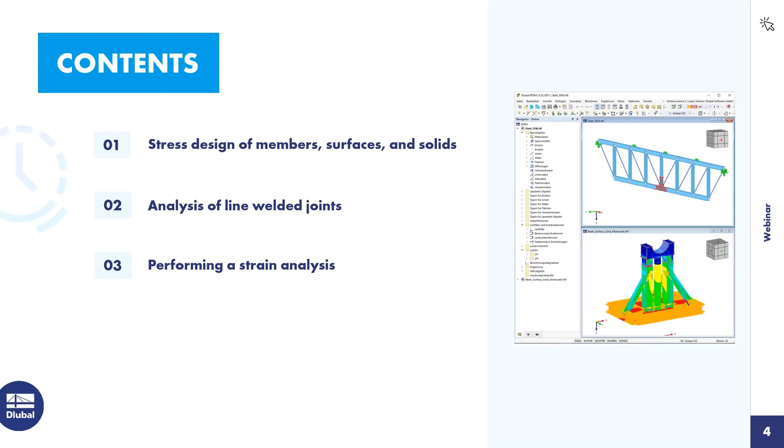I will do it as a live demonstration, so I didn't prepare any additional PowerPoint slides, so I will jump directly into the program. Today I also would like to work with predefined files in order to keep the focus on the essential topics. What do I have here? I have a mixed structure here, mixed meaning I have a member structure, surface elements, and also solids. Let me quickly change the rendering so you can easily see the differences.

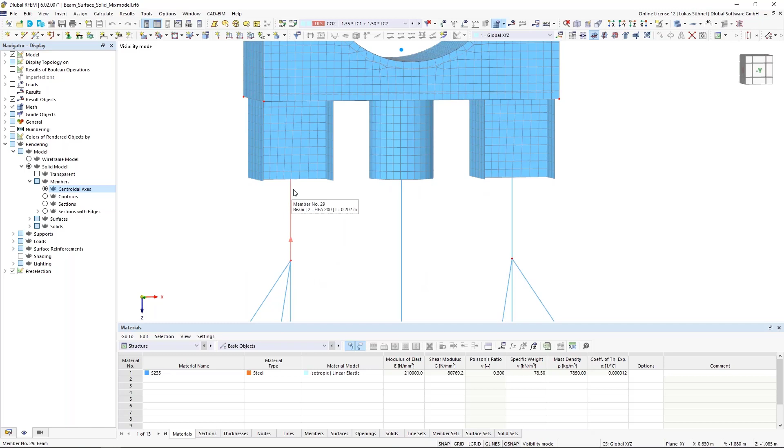On the bottom, we have this member structure. Then I converted a certain part of my members into a surface structure, as you can see here. It's just the continuation of my members if I display them again. And on top of that, I have my solid model on which I will place some loads.

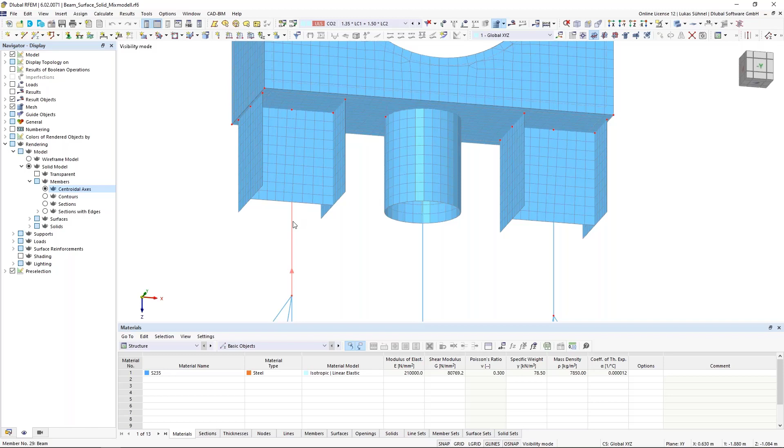Regarding the modeling, which is maybe also interesting to know, in general we can model members, surfaces, and solids in one structure, which is already quite nice. And if you think about the load transfer and the correct transfer of the stiffness, you have to take care of some things when you have 1D elements and 2D elements. By simply converting these members into surfaces, as I did here, often you don't have a properly defined connection.

You can see it on the left. The surfaces in that area are now basically supported on only one FE node, the FE node where this member connects to the web of this beam. That is of course not correct. You would definitely get singularities in that area, and the stiffness transfer is also not correct.

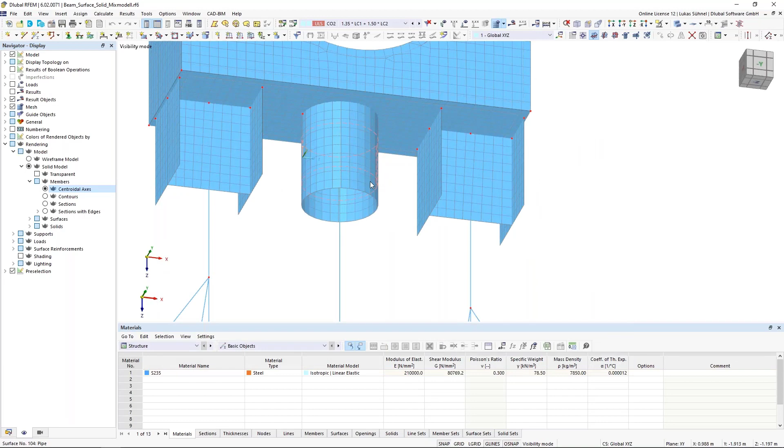Another example can be found in the center. We have here a pipe section. When you convert a pipe section into a surface, you get, of course, the pipe surface. And in such a case, you have no connection at all. You can imagine the member is in the center of that circle, and the surface is not connected to that member at all. So here we also have to do some modifications in the modeling to have it properly connected.

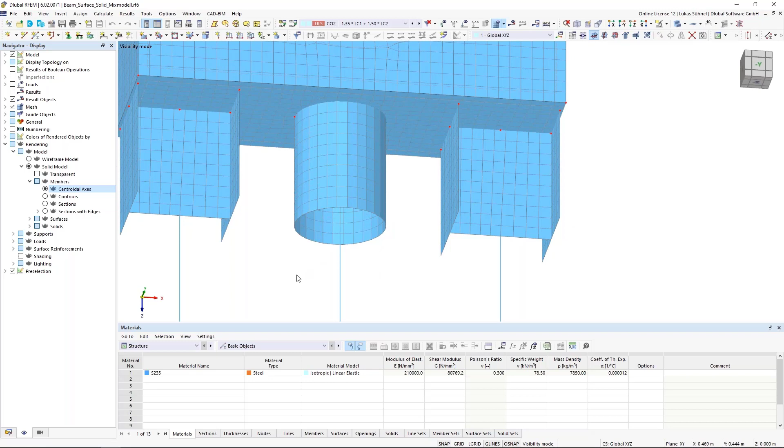And I have it here, I just didn't show it so far. So I will cancel my visibility mode, and the connection can be done in, let's say, two ways. I can use so-called rigid surfaces, and this simply will transfer all my forces and my deformations that I have in this beam, or also vice versa in those surfaces, via a stiff surface onto the other side.

In the center, it's even more crucial, because with this stiff surface or rigid surface, I'm connecting my member with my surface. Before I had no connection at all. And again, of course, all deformations and internal forces will be transferred from the beam to the surfaces equally, let's say. An alternative modeling is visible here on the right-hand side.

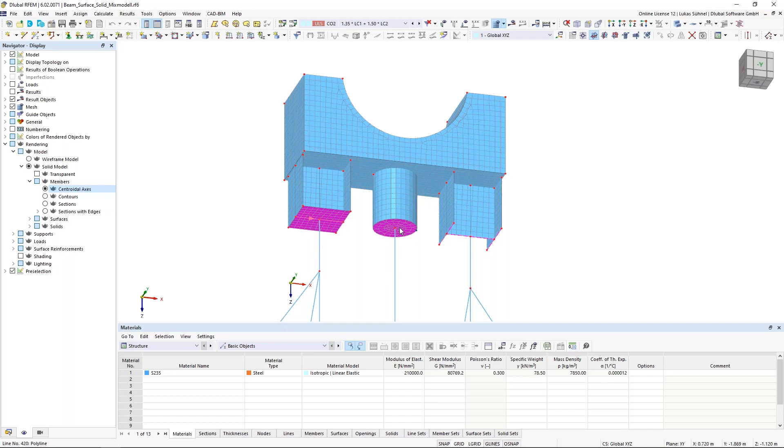Instead of using a rigid surface, I simply assigned rigid members onto the boundary lines of my surface model. A member with a member type rigid, and it works similar to my rigid surface. So this is how you can connect a 1D element with a 2D element. The rigid surface or rigid member may help you here.

Regarding the connection of a surface model with a solid, well, this is quite easy. The surfaces are defined by the boundary lines. These are those lines here, which you can see, and these lines are placed inside the boundary surface of that solid, and we have a so-called automatic object detection in those surfaces.

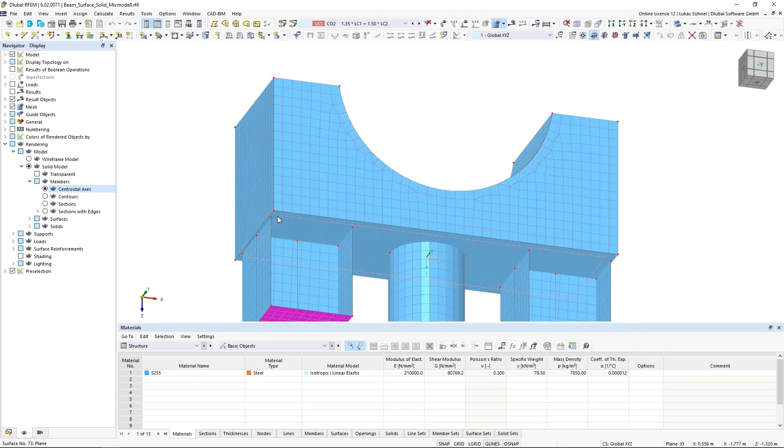So the surface detects that there are lines placed inside the surface, and if that's the case, then the FE mesh generator will automatically consider those lines when the mesh will be generated. So we have a fixed connection between these surfaces and the solid. So far regarding the modeling.

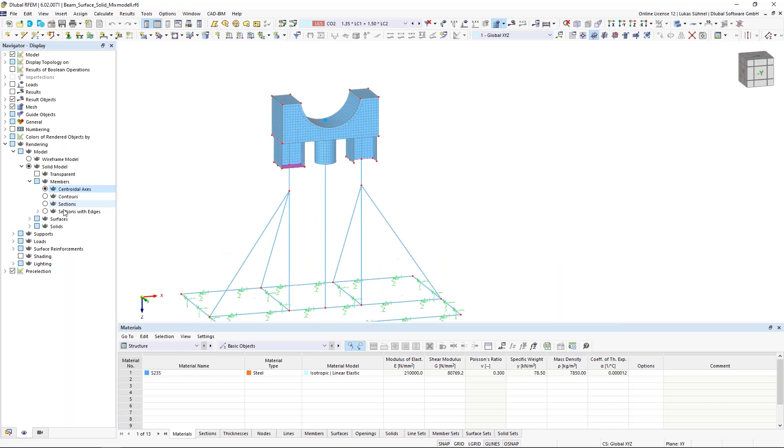Regarding the loading, these are German names, never mind. I have two load cases. I have my dead load case here, and then some load in my live load case. That's all I want here in that example. And of course, we have the combination of those load cases using an ultimate limit state design situation and a serviceability limit state design situation.

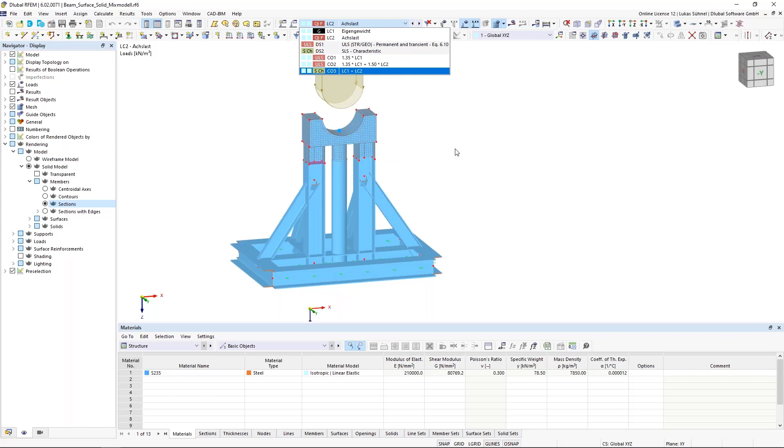Now, if we want to design such a structure, we have, let's say, two main designs that we have to run. We have to run a stress analysis or a cross-section check for our objects, and we have to run a stability design. Regarding the stability design, I would like to take a look at the results first. So that's what I will do now.

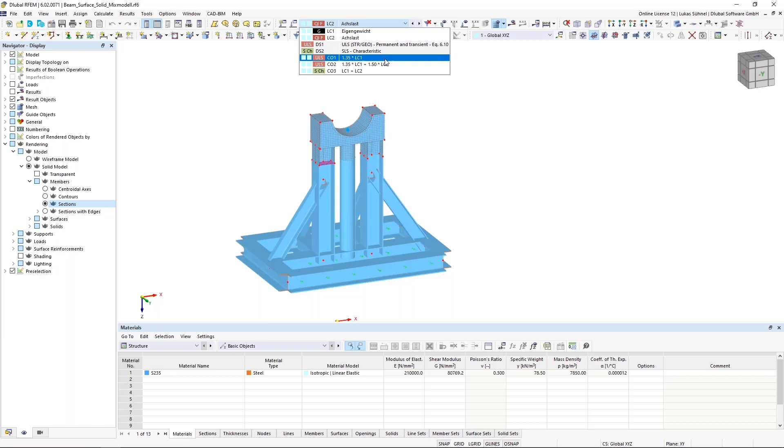I will calculate the, let's say, important load combination. I have just one here that actually matters: the combination of the dead load and the live load. And let's have a look at the results, maybe just on the members for now. I can display the external forces in here, maybe in a different view like that.

All right. And what I can see here is I have, of course, compression in my, let's say, columns or in my members. So compression is, of course, a sign for buckling. So if I have compression in members, I have to check buckling. And what else do I have? I have some shear forces inside, but they are really small. So shear buckling is most likely not an issue. I have really small torsional moments.

I can neglect them. And my bending moments, MY and MZ, are also quite small compared to my cross section or to the dimensions of these beams. So I would say also the bending moments can be neglected. What does it mean? If I neglect the bending moments, then lateral torsional buckling is most likely not an issue.

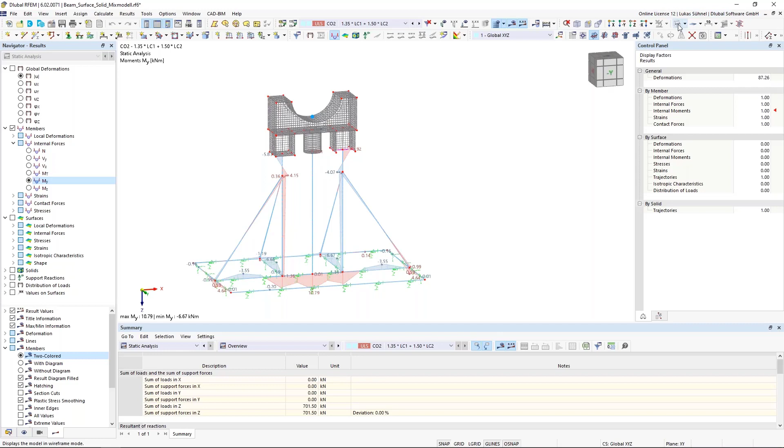And if I check again my structure, I have all these diagonals here that are connecting to my columns, a pipe section, which is where lateral torsional buckling is not important at all. So I think it's fair to say lateral torsional buckling is not an issue here. What could be an issue is, of course, buckling.

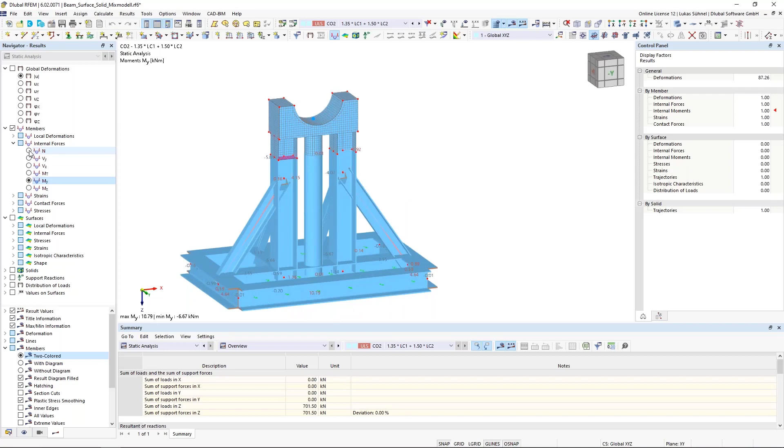But for buckling, I can use some limit checks or, let's say, some specific checks to judge if buckling is actually an issue. And such a check can be found inside the Eurocode 3 in chapter 6.3.1.2(4).

The formula basically is you take the axial force in a member and you divide it by the critical force of a member. And if that is smaller than 0.04, then you don't have to run a buckling check for a member. If we switch it around, if we say the critical force of a member divided by the existing force, if that is bigger than 25, then buckling is not an issue. And this is a value we can check via a specific add-on.

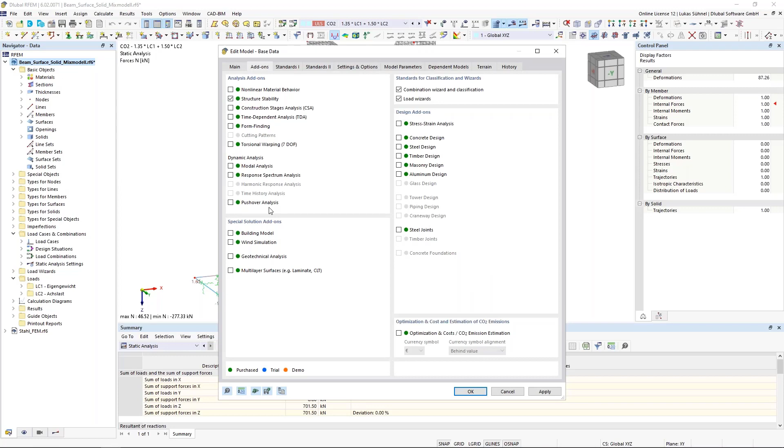And I want to do it quickly before I start the stress strain analysis. So if I go into my add-ons, I can activate the structure stability add-on. Now this will calculate this critical load factor, which is the same as I just said, the NCR, the critical force divided by the actual force. And I will calculate it in this specific load combination. I can activate now the calculation of the critical load, and I will start the calculation.

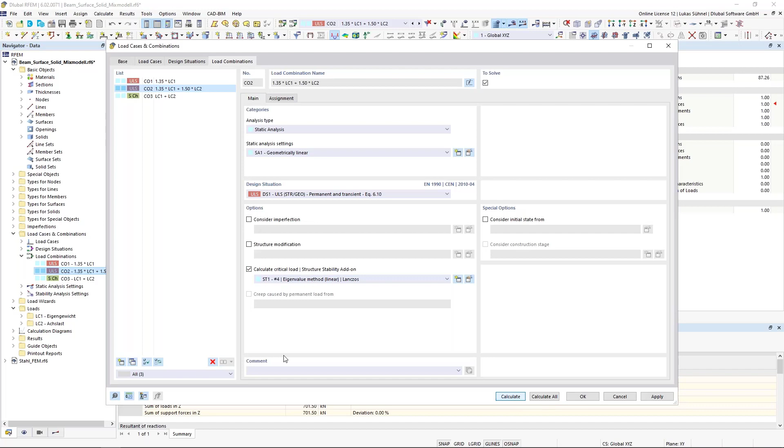So this add-on will calculate this critical load factor. It will also calculate buckling lengths and so on, buckling length factors. For me, important is now only the critical load factor. And again, if that is bigger than 25, then buckling is not an issue. Just a few seconds more. All right, there we are.

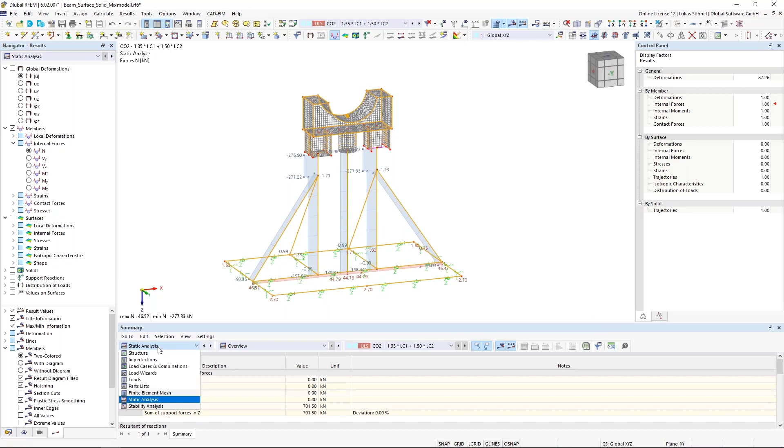So how can I display these results? Well, I can switch in my tables to this stability analysis add-on. And the first value that will be shown here is already the one that I'm interested in. The critical load factor is 29, which is bigger than 25, so I'm good. And if I want to analyze it even further, I would have to look for an eigenmode that actually deals with the buckling.

And this could be, for example, the fourth eigenmode. And here we see this would be some kind of buckling for my columns. I have here the factor 34.5, so much bigger than 25. So I can easily say buckling is not an issue. Now I excluded buckling and lateral torsional buckling. That means it is enough to simply run a stress analysis for the structure.

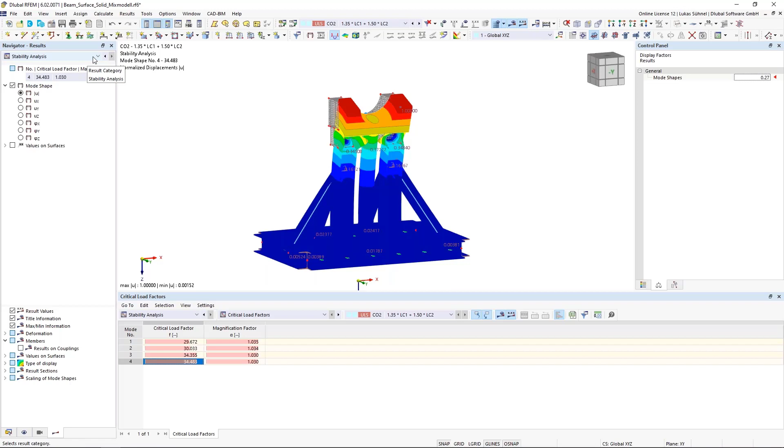I can do it, let's say, in two ways. First of all, I would like to check what result the basic RFEM gives me. So I go back into my static analysis results without using any add-on. And I can see that RFEM calculates the deformations, of course. It calculates the internal forces in members. It calculates the internal forces in surfaces and so on.

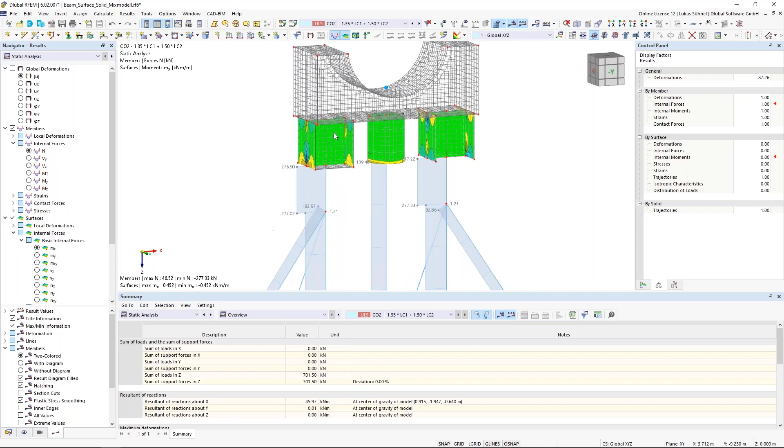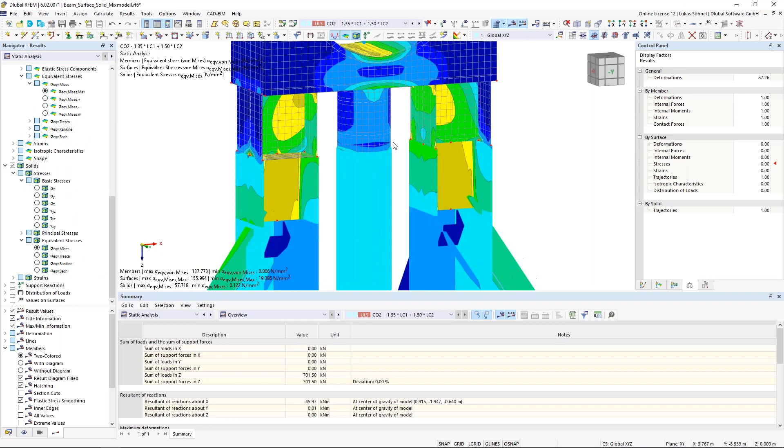But it also gives me the stresses in members, so for example, the equivalent stress according to Mises. It also gives me the stress inside surfaces, and of course, also in my solids. So now I'm displaying the stress on all elements.

And you could use the information in this panel on the right-hand side, or this max-min information on the bottom left of this graphic window to see that the maximum stress for members, for surfaces, and for solids is below the yield stress from my steel S235, 235 Newton per square millimeter. We are actually below the limit, so the stress check is fine.

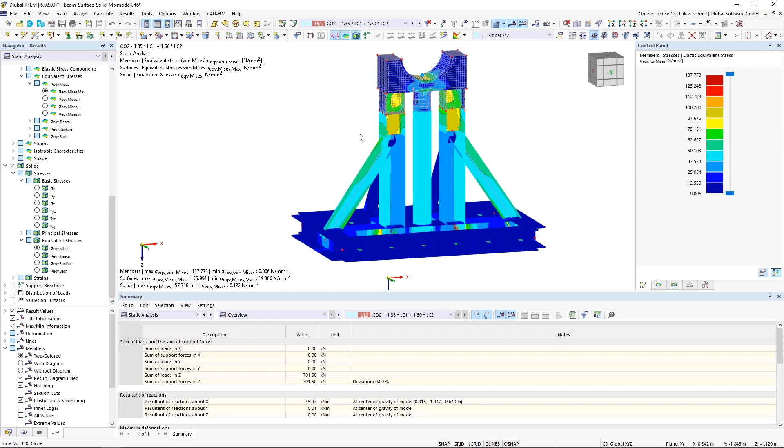Now, if you prefer a design ratio, not just a graphic which shows that stresses are smaller than 235, then you could use the stress strain analysis add-on for that. So let's check this out as well. I will activate the add-on in my add-ons tab, as I did it before with the structure stability. The stress strain analysis add-on can be found on the right-hand side under the design add-ons.

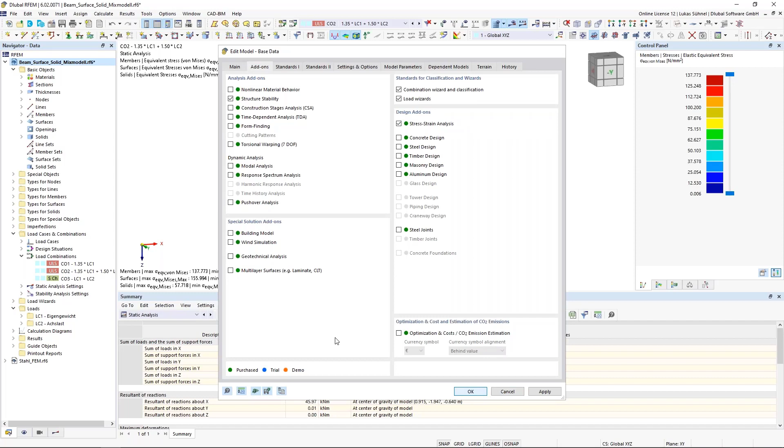And usually we have to deal with the standards. If we run a steel design or a concrete design, then the standard is important. The stress strain analysis add-on is standard independent, so we don't care in that case. Now, when you activate an add-on, you get a new entry in the tables, and this is how I personally usually deal with the add-ons. I go into my table on the bottom and click through these subtables. Let's do it for this example.

Just use a different display. I'm here in the input data in the first subtable, design situations, and here I can decide which design situation should be analyzed. Of course, it makes only sense to analyze the ultimate limit state and not the serviceability limit state design situation, so I deactivate the second one.

In the next table, you can select which objects you want to analyze. Here, all objects are selected. Of course, you could select the surfaces or the members that you want to analyze if it's not all of them. In my case, I will simply analyze all.

There's another table which looks quite similar, but this is called objects to analyze stress ranges. So if you want to run a fatigue design afterwards, that's what you have to do. For this design, you need the stress range - the difference between the maximum and the minimum stress on a certain location. Then you can also select those objects where you need the stress range for. In my case, let's say I need the stress range in my solids, then I'm selecting the solids.

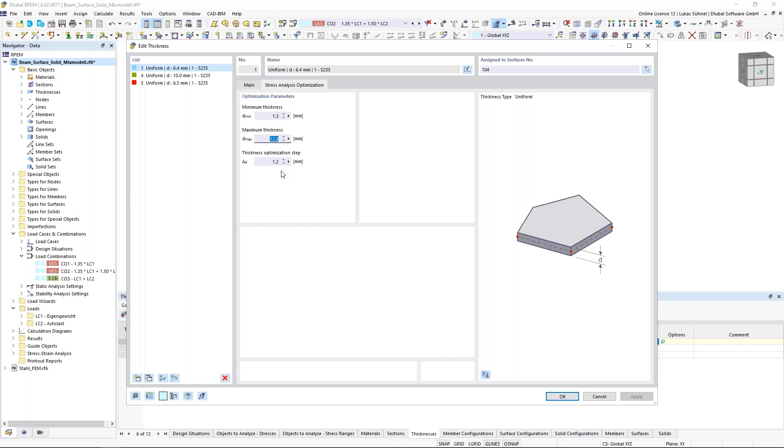We have the same optimization for surfaces. So let's say you have a specific surface and you are not sure which thickness is appropriate. You can right click, you can activate here also the optimize functionality. Then you get an additional window, and here you can define the minimum thickness, maximum thickness, and the step. Then it will look for the best thickness. I will not use this now, just as an information.

Now we have 3 additional subtables here, configurations. In those configurations, you can define which stress do you want to analyze. You could, of course, select all of them, but usually that's not what you care of. Usually you care only of, let's say, maybe the equivalent stress according to Mises, maybe the total shear stress, maybe the total normal stress. This is maybe what you're interested in.

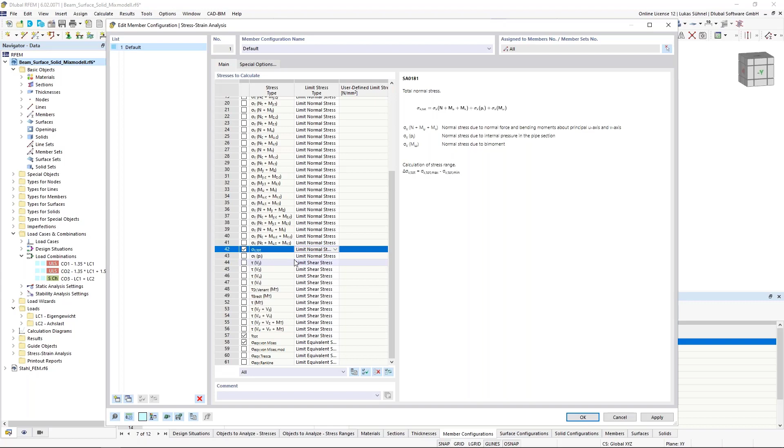So with the click in this table, you select which stresses you want to calculate, and with the center column, you can also define the limit stress. You can see here the limit normal stress, limit shear stress, and limit equivalent stress is selected. We try to do it automatically for certain materials. For some materials we can't - in that case, you can select here user defined, and then you can enter a value in the last column. In my case, I'm using the limit normal stress.

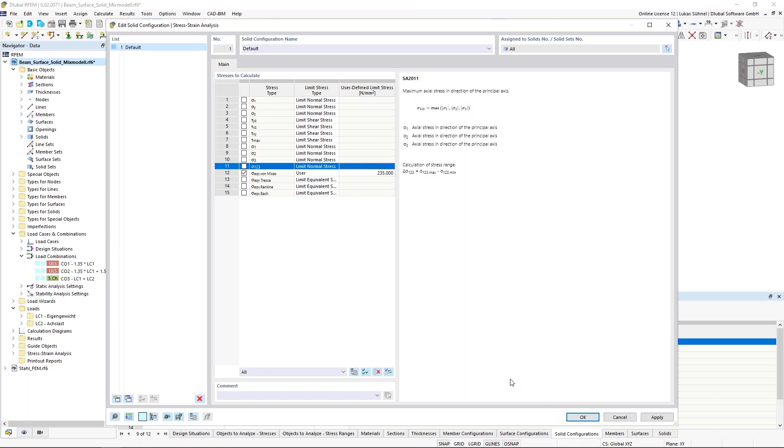For the surfaces, the same configuration basically. Let's select only those two. And also for the solids, we have a configuration. Again, I'm only interested here in the equivalent stress according to Mises. And just to show it, we can enter here a manual value, maybe 235 Newton per square millimeter for my material, which is an S235. So that makes sense.

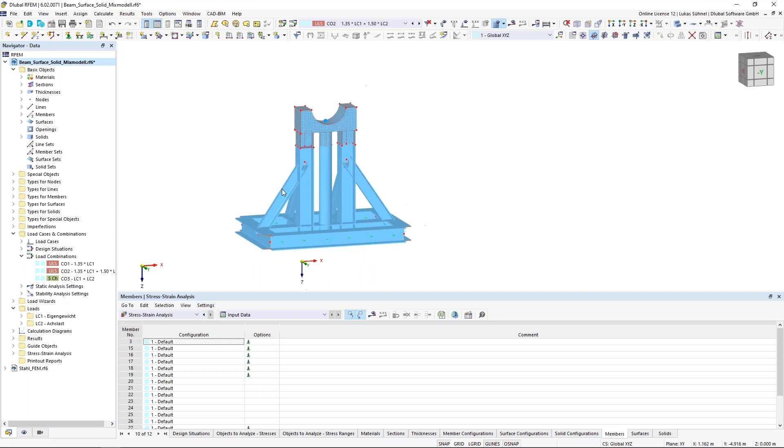In the last tables, you can assign the different configurations that you may have to your members, but you can also do it graphically. So let's say you have multiple configurations for your members, you can edit the members and simply assign the configuration in that window to them. So the handling, I'd say, is quite easy. We already finished with the input, so we can run the analysis.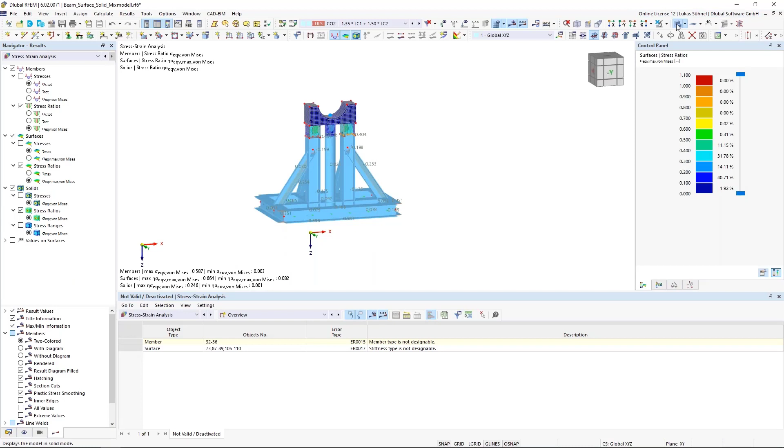All right. So after the analysis, we get results graphically and also in the tables. Let's start with the tables first.

If there are design checks which are not fulfilled, or you have selected objects that can't be designed, you get an overview table. If everything is okay, you won't see this overview table. Just in case something is not correct or you get a warning, it will show up as shown here. We can see for some members and some stiffnesses or surfaces, the design is not possible.

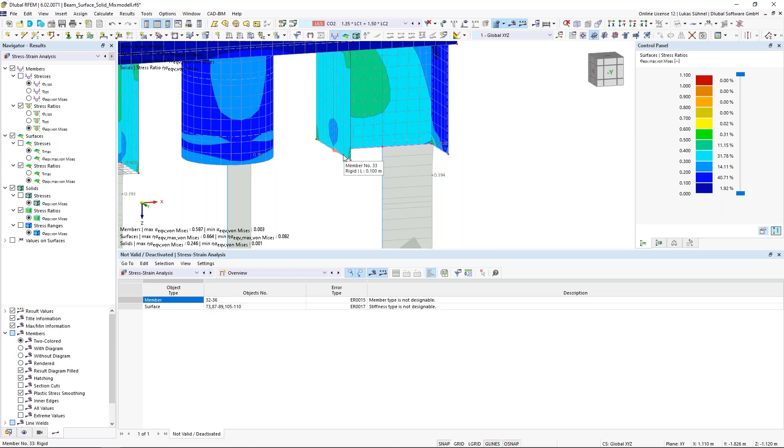That's nothing which should bother us. At the beginning, we said please design or analyze all members, including the rigid members. That makes no sense basically - we have no section for them, we have no material assigned to them, so we can't analyze them in this add-on. That's what this add-on tells us: they are not designable. Same of course for the rigid surfaces. So nothing we have to worry about in that case.

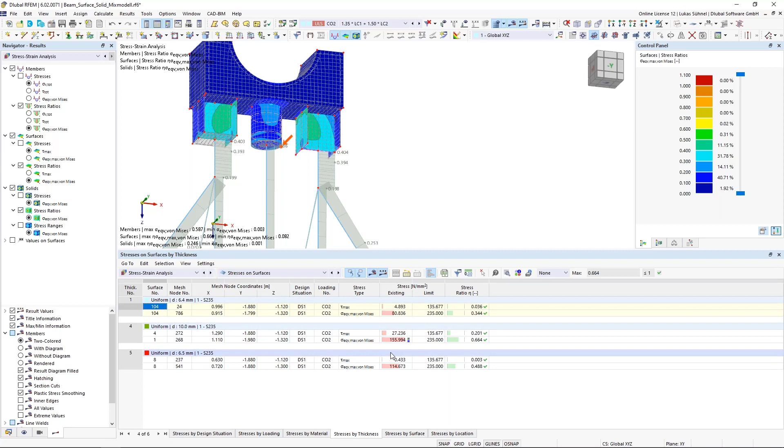If you want to see the details of the results, we can go into the stresses on members tables, or stresses on surfaces and stresses on solids. This is the stress or table output with different filters by design situation, or for each surface the maximum stress, or for the various thicknesses we have assigned. So these are the filters basically for the results.

We can also display these results graphically. On the left, you can see we have an updated result navigator now for the stress strain analysis results, and here we can select the stresses in our members, on the surfaces and so on. I think this is quite clear how to handle that.

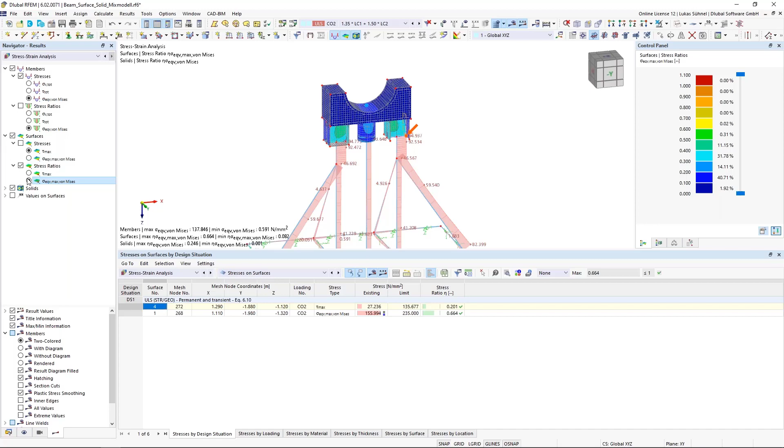And the last information here, we also selected the solids for a stress range analysis. Again, those results can be found in the tables. This table looks a bit different, as you can see - you can see the minimum stress, the maximum stress, the range, the difference basically, and you can also see from which combination or combinations are linked to this stress range.

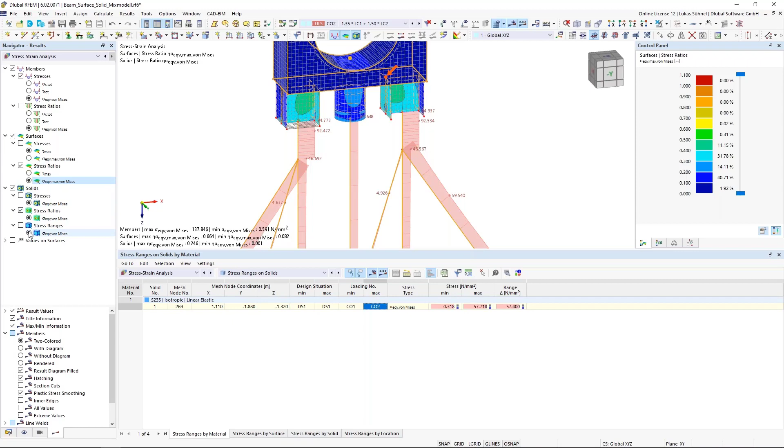All right, again, we could display this graphically. So far regarding this basic functionality, the stress analysis on members, surfaces, and solids.

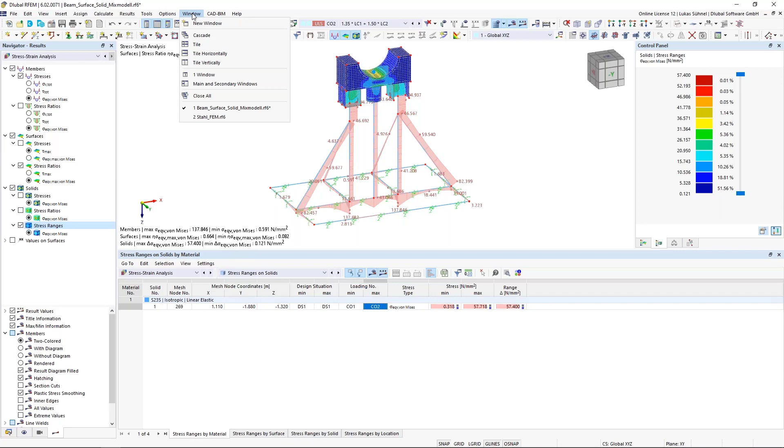And now I would like to switch to my second chapter, where I would like to show you the stress analysis of a line welded joint. For that, I have a different structure. Let me quickly explain it. It's a 2D truss member. Basically, the tension forces will be taken over by these round bars, the compression by these HEA sections.

One particular detail joint I wanted to analyze with surfaces. You can see the rest of the structure is again a beam structure, a 1D element structure, and this specific detail I want to analyze in detail using surfaces.

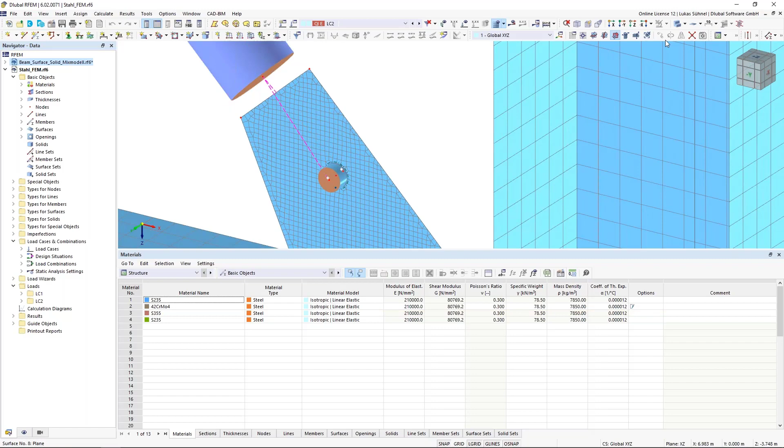I modeled the connection plates here - these tension members are connected to this bolt, and this bolt transfers the forces onto my connection plate. The force transfer, for those who haven't seen that before, can be done like this. Usually you create an opening inside that surface where the bolt goes through. But if you have a bolt in the center as a member element, it's not connected to the surface, so somehow you have to establish this connection between this node and this connection plate.

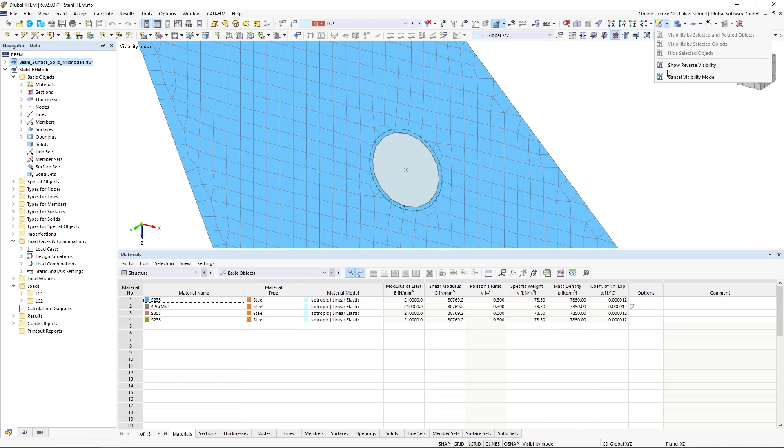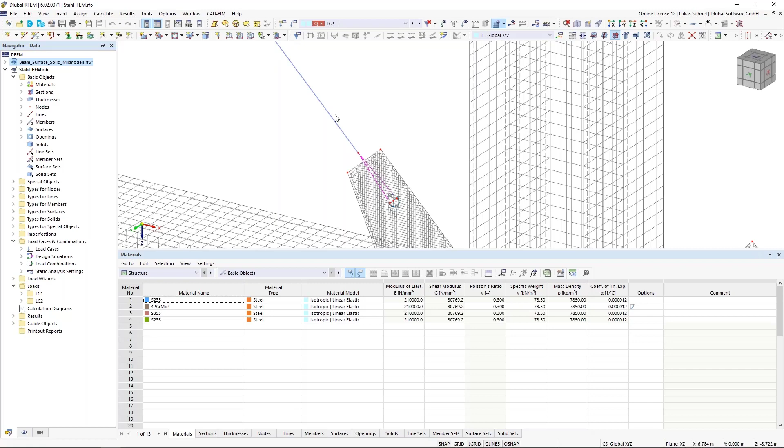This can be done using a specific surface. So I filled that hole with a surface, and that surface has a stiffness type without membrane tension. This specific type simply acts only under compression. So you can imagine if we have tension forces in that tension member, the bolt will move to the top left, upwards, and we will get compression in that area. We will get tension on the back side of this plate, but since this surface will fail under tension, we have only forces on the left-hand side. This is a good feature to consider this connection between the bolt and the hole.

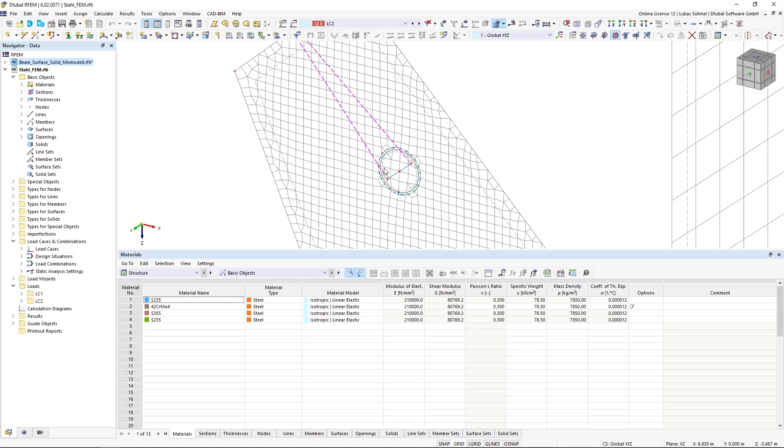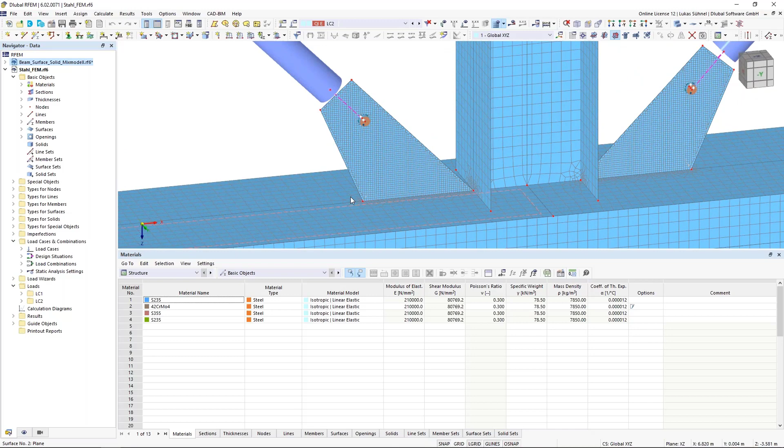All right, so far regarding the modeling. I have my steel connection plate here, and the steel connection plate should be welded to the top flange of this I-section. Now, if I want to design such a weld, I can use this new object which we have in RFEM 6 - it's called line welded joints. You can find it under types for lines.

And you can define a new type in here. Let's say this weld that I want to design is a T-joint, a single fillet weld, continuous arrangement, and the weld size is 4 millimeters.

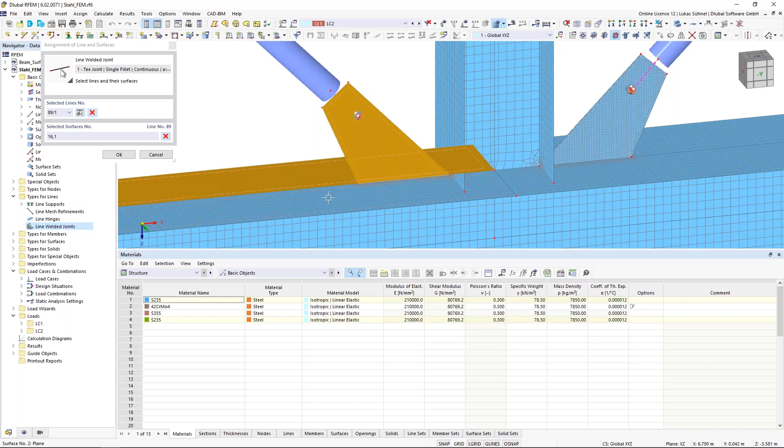So far, so good. Now I can assign this type to my lines, and the weld should be placed here. It's not enough to just connect the line, we also have to select the surfaces that are participating - that's this connection, or steel connection plate, and the upper flange of my beam.

Okay, that's how we can define such a line welded joint. We will show it as a dotted line on each of the participating surfaces.

And if you want to design such a weld, you need the stress strain analysis add-on. Basic RFEM 6 won't give you any results for that line welded joint, so it's required to have the stress strain analysis add-on. That's why I'm activating it again.

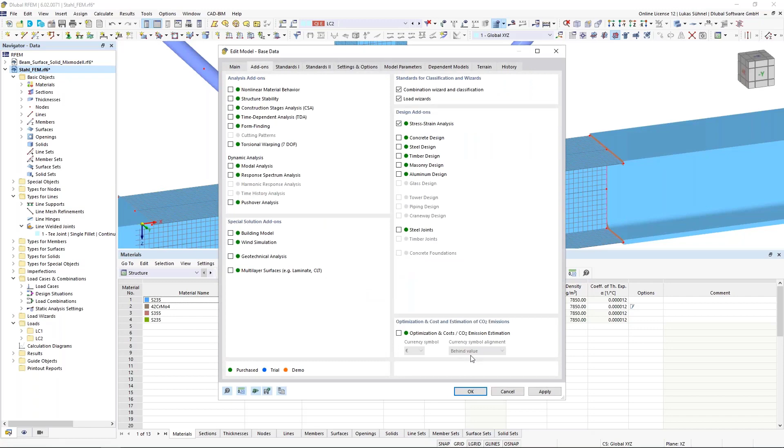Now let's go quickly through the input of this add-on. I'm starting again with the design situations. I think that is clear.

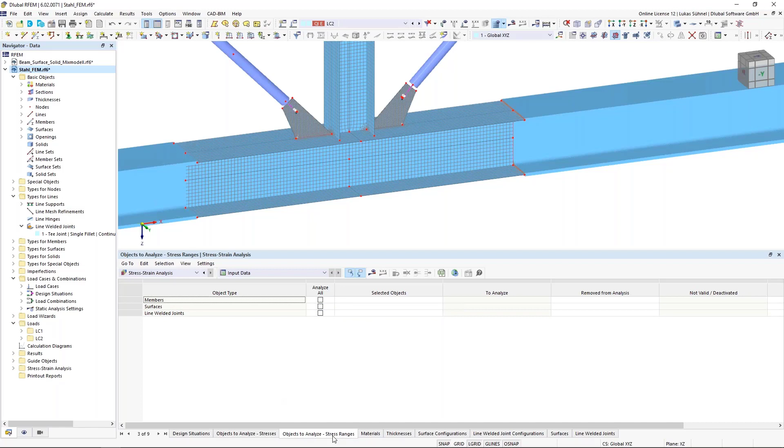Objects to analyze - in that case, I don't care about the stresses in my members. I want to select just some of the surfaces that I want to analyze, not all of them. And of course, I want to analyze my line welded joint. Stress ranges, I don't care in that case here.

I will continue with the surface configuration. Again, I will select just some of the stresses - I'm not interested in all of them. Maximum shear stress, maximum stress according to Mises is quite interesting for me.

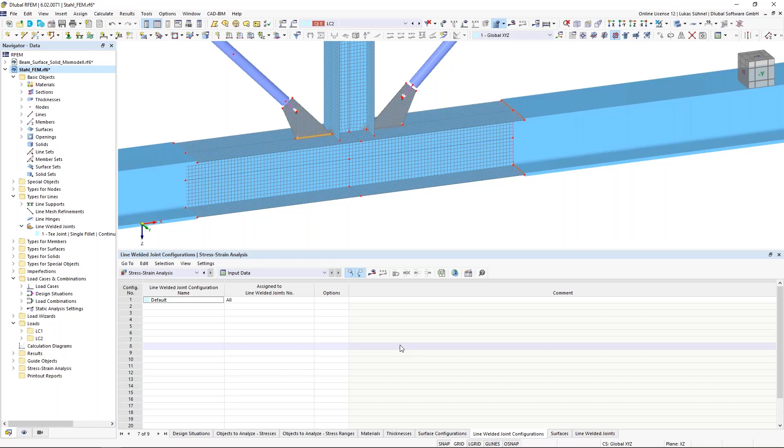And now we have also a new configuration for my line welded joint. Each specific object has its own configuration: surfaces, members, solids, line welded joints.

In here, it looks basically the same - I can select which stresses I want to calculate. Even though you select maybe all of them, not all of them will be shown.

It depends. For my fillet weld, which I have here, I have two different methods, the simplified method and the directional method, for example. Let's say we are using the simplified method.

For that method, I only need the following stresses, those four, and the resulting weld stress. If I select the others as well, they won't show up in my result table - they are not part of this simplified design method. So that's why I select just those four, those five.

Same logic as before - when we select the stress, it means we tell, or we say to the add-on, please calculate the stress for this specific stress type.

By default, we do not get the limit stresses for the welds. You can see it here, it's selected none. Why is that the case? Well, we are standard independent in that add-on. The limit stress for welds is, however, standard dependent usually.

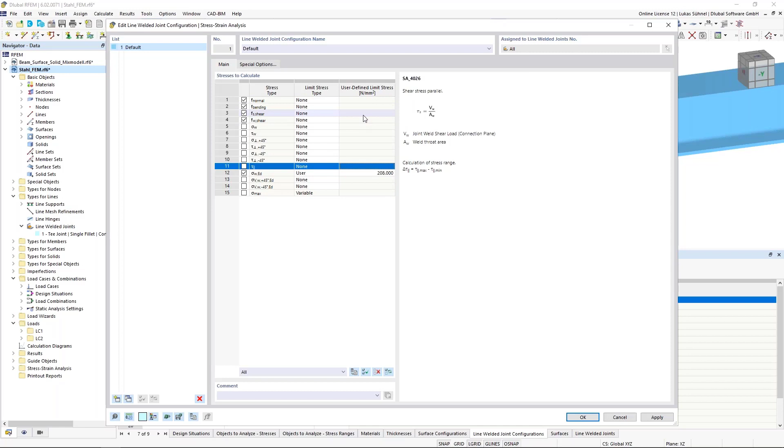Let's say we assume here a Eurocode design, then the limit stress for this simplified method would be for an S235: FU divided by square root 3, multiplied by beta W, multiplied by gamma M2, which is 208 Newton per square millimeter. I could also enter this limit stress for the other types, but it doesn't matter - I only need it for the resulting stress.

All right, so far so good. I defined all necessary inputs, and now I can run my stress strain analysis again.

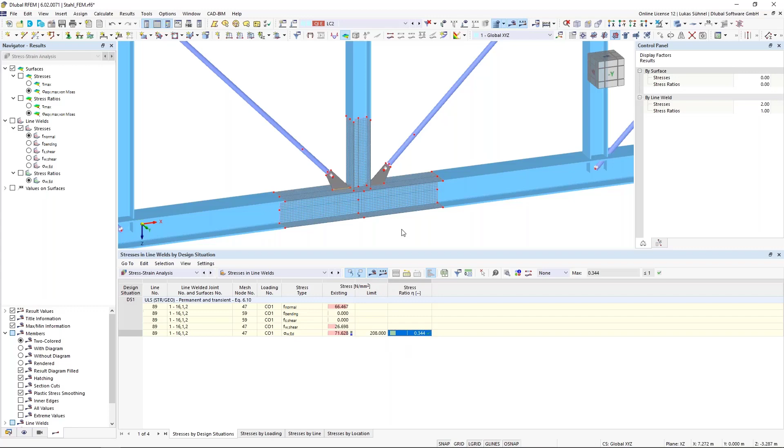Okay, I get the overview table. It shows me some exceeding stress for my surfaces. I will take care of that later on. Now I'm interested in the line weld stresses, and we can see here we have an existing stress of 71 Newton per square millimeter, which is smaller than the limit. So we get the design ratio, and the weld has been checked.

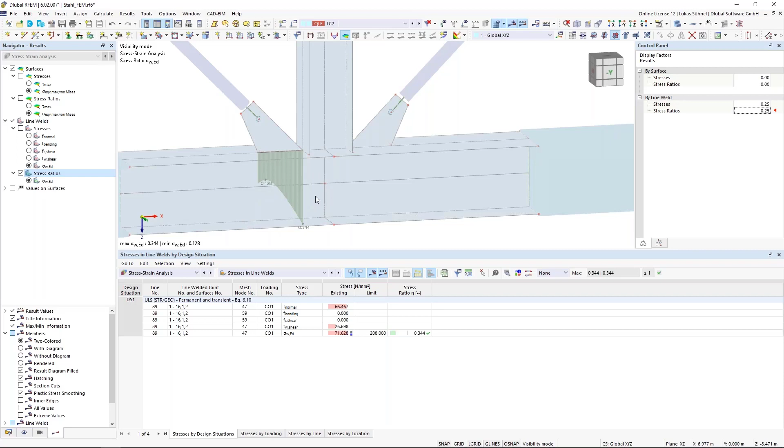We can also display the results graphically as usual. Let me show it quickly. We get the diagrams also shown here. Maybe it's better to select a specific visibility for them. The different stresses: normal stress, shear stress, also resulting stress, and of course also a stress ratio, and that's it. You can of course print these graphics into your protocol as you are used to in Dlubal. The tables will end up in the protocol, so I think the handling, the post-processing is clear.

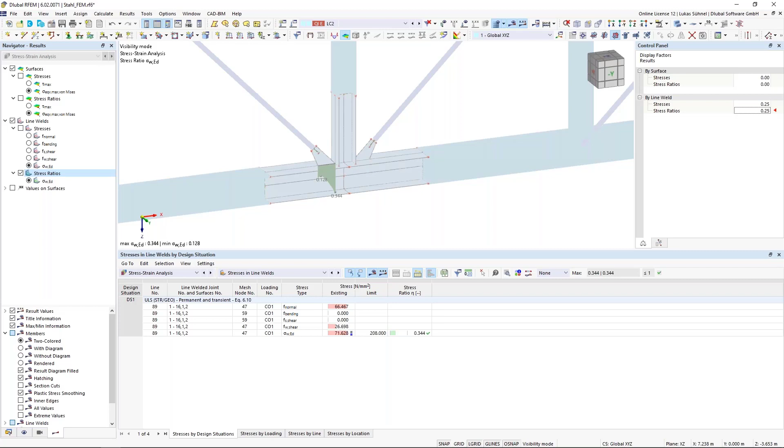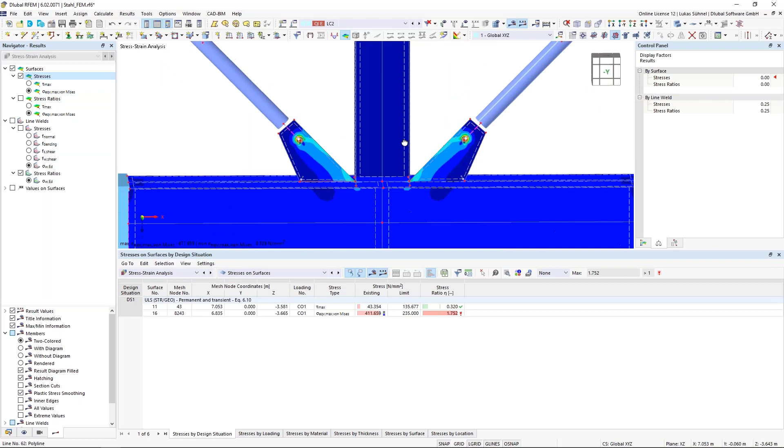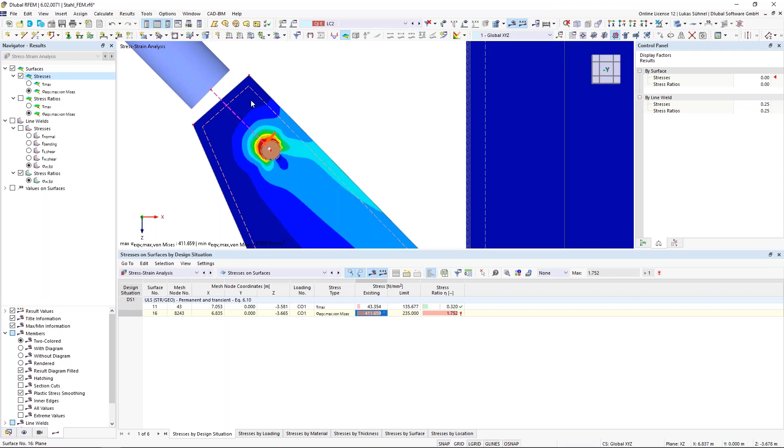So far regarding the line welds. Let's analyze this exceeding stress in the surfaces. Let's display everything again. Maybe let's turn off the FE mesh for a second. And of course, we need the stresses in the surfaces. What we can see here in the table already is that we have an existing stress of more than 400 Newton per square millimeter, which is of course exceeding the limit stress. And by clicking on this table, we see this nice arrow, which shows us where the issue is. The issue is where we have the bolts connecting to the connecting plates.

Now, I think it's quite clear that such a stress cannot show up in reality simply because the S235 will yield when it reaches the limit stress. It can't get these kinds of stresses. The steel will yield, it will deform. So we get these high stresses because we use a simplified material model for our steel. The default is usually an isotropic linear elastic material model, which means we can get infinite stresses.

Since this is not exactly correct, we could in theory use a different material model. The default material models are, however, only isotropic linear elastic or orthotropic linear elastic models. Plastic is not supported as a default setting. If you are looking for more advanced material models, you would need the Nonlinear Material Behavior add-on. I can select it here. And now you can see if I edit my material again, I have many more material models, for example, the isotropic plastic material model for surfaces and solids.

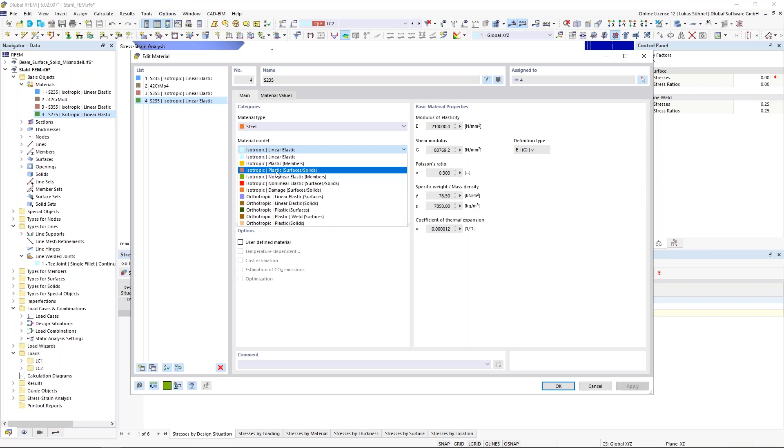That's the one I select. And these are the parameters for this material model. I can select the basic, bilinear, or stress-strain diagram. I stick to the basic diagram type. That should be enough for my case here. I could select the stress failure hypothesis. This is fine for me. And that's all I need to define. If I assign this material model to my material, it means it will yield as soon as it reaches the yield strength of about 235 Newton per square millimeter.

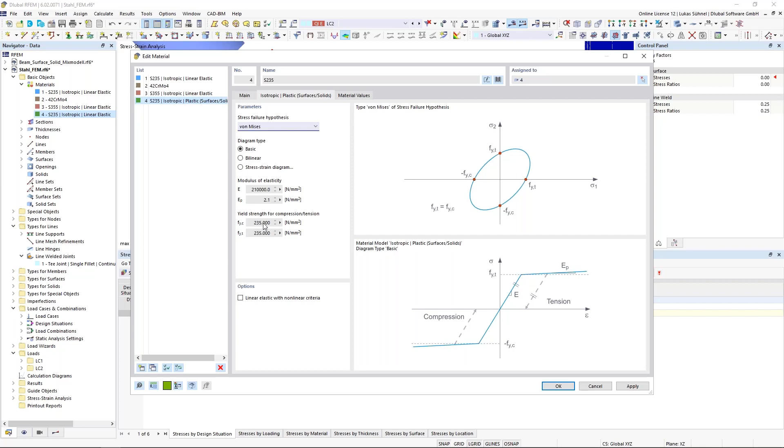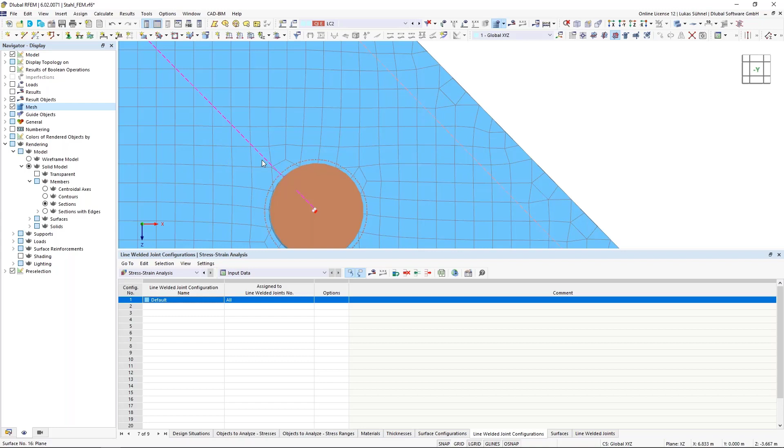How do we do this in the calculation? For that, I would like to show the FE mesh again. How do we consider this yielding? Well, you saw before that we had some stress peaks in that area here. The stress in those FE elements was higher than the limit stress. If that is the case, with the plastic material model, we will reduce the stiffness of an FE element.

So we take a look at each FE element and we reduce the stiffness of those FE elements where the stress is exceeding the limit stress. If we reduce the stiffness, they will deform much more, and the other elements with the regular stiffness will take over more of those forces until they maybe also reach the limit stress. Then we will reduce the stiffness again, and so on. That's the logic that we're using here. Since we do it on this FE element basis, we should also check the results on FE elements.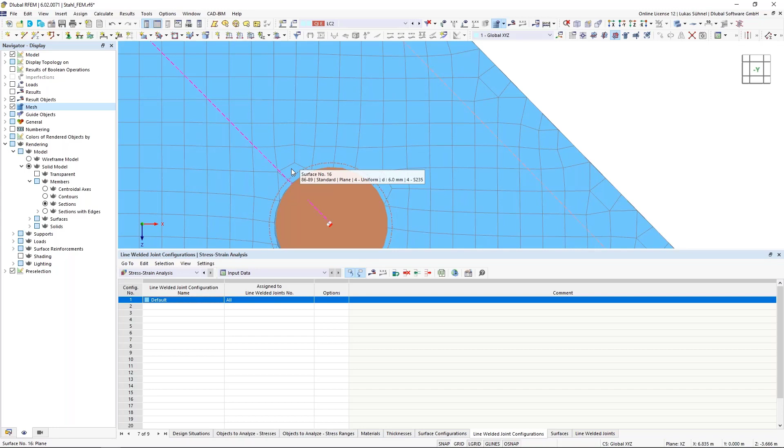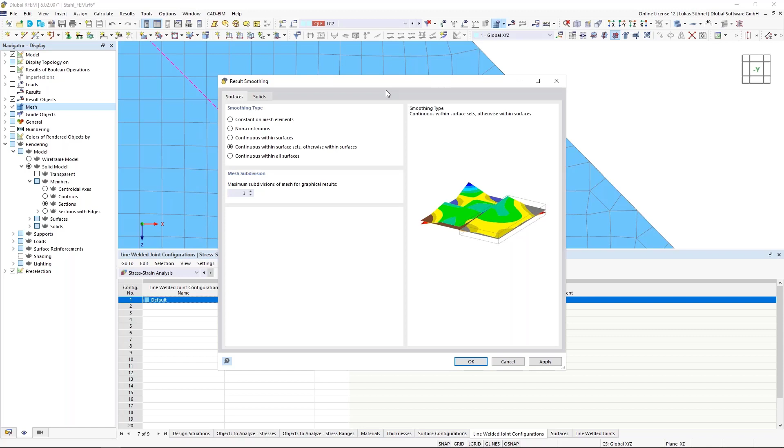What does it mean? I can go to my calculate menu under the result smoothing function and select here constant on mesh elements. The default, I think, is continuous within surface sets or otherwise within surfaces. On each FE node we get a result, and usually we use some functionality to smooth those results so that they look nice. In this particular case, with this FE mesh specific look on the results, we should set it to constant on FE mesh elements. So we get this pixel-like look afterwards.

This setting under calculate result smoothing is for the results of RFEM 6 itself. We have the same setting in our stress strain analysis add-on. So if I go on the bottom left, stress strain analysis settings, I can also select it for this add-on, which I'm doing here.

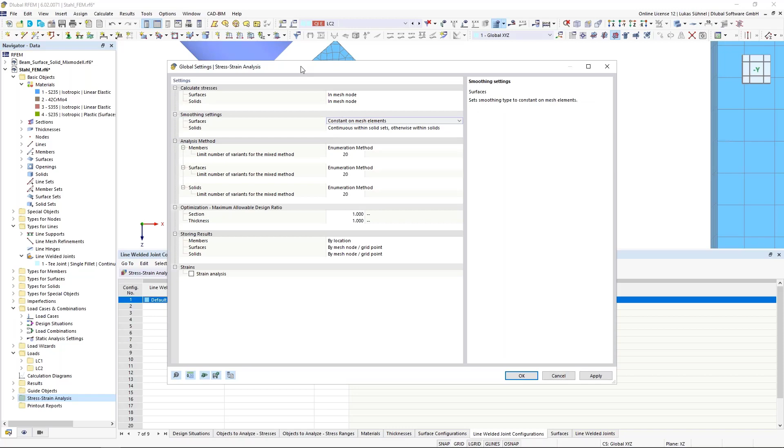So now I can recalculate the results, and small spoiler, we won't get any stresses higher than 235 Newton per square millimeter due to this material model. So the stress check is fine. It's not a big issue anymore, but that's not the end of the check. We will get higher deformations.

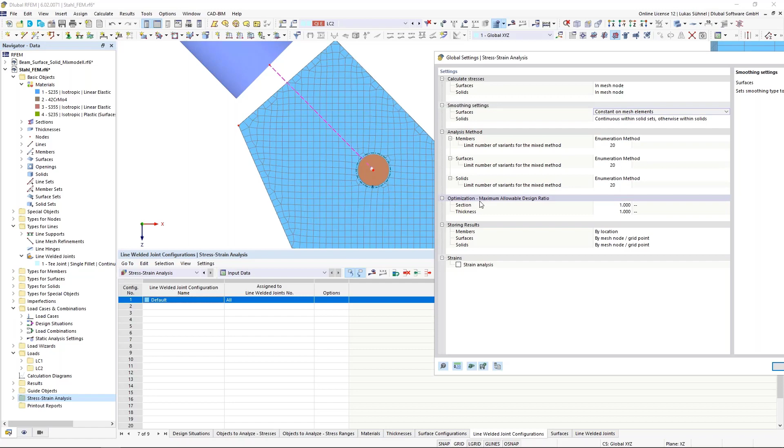We get these plastic strains probably in our structure, and that's usually what you look at when you use the plastic material model. You check the strains because the stresses are not relevant anymore. And we can run also a strain analysis inside the stress strain analysis add-on. That's basically what the module name is, stress strain analysis. We can activate the strain analysis also in these global settings. Where I change the smoothing settings, I can activate here the strain analysis.

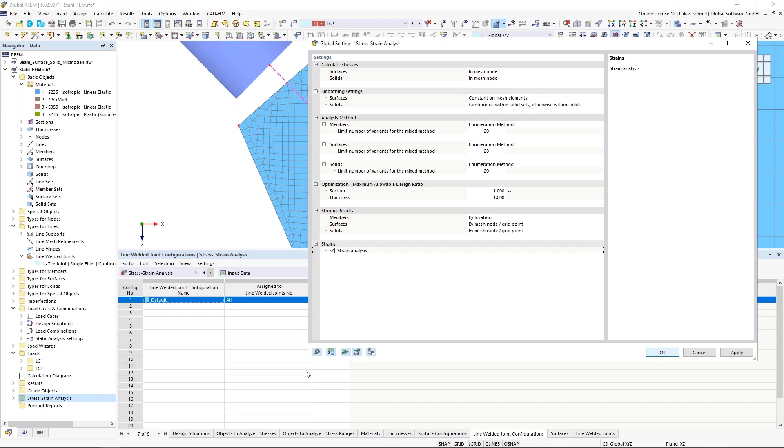I click on OK. And if I activate that analysis, I can go back into my surface configuration. And now I have this additional tab here. It shows me now strains, and I can select which strain it should calculate. Let's say the Mises strain. And we also have a limit defined for that. We have a plastic limit strain of 5%. That's what we defined here. You can change it, of course, by simply clicking into it and defining a different value.

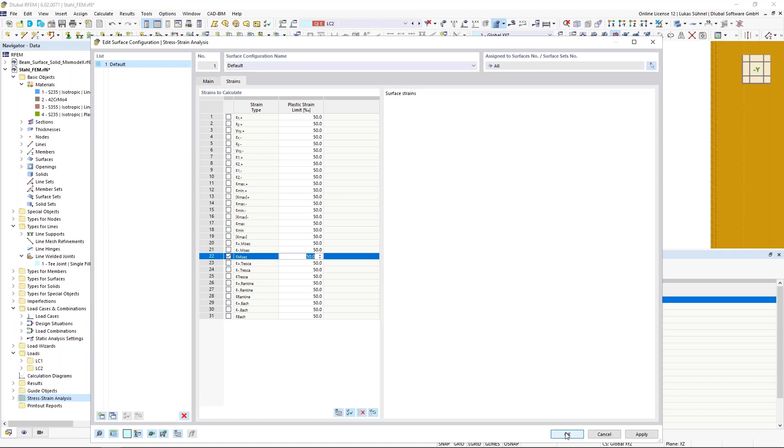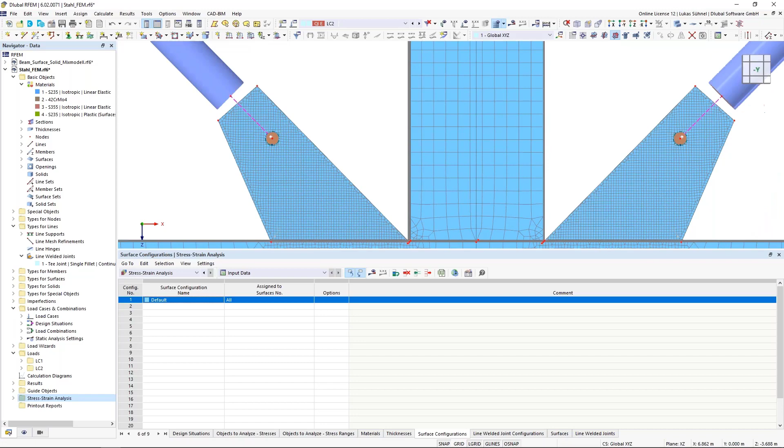Of course, you could say your limit is when the strain is so big that the bolt moved completely through your connection plate, so that the structure is unstable during the calculation. I'm not sure if that's the right limit. We defined here the 5%, but at the end, it's up to you. All right. That's all that I have to define here.

Now I can run the stress strain analysis again. It will take a bit longer because now it's a nonlinear analysis. Each FE element is nonlinear, so we will need more iterations until we get an equilibrium, but still quite fast in that example. All right, let's have a look at the results.

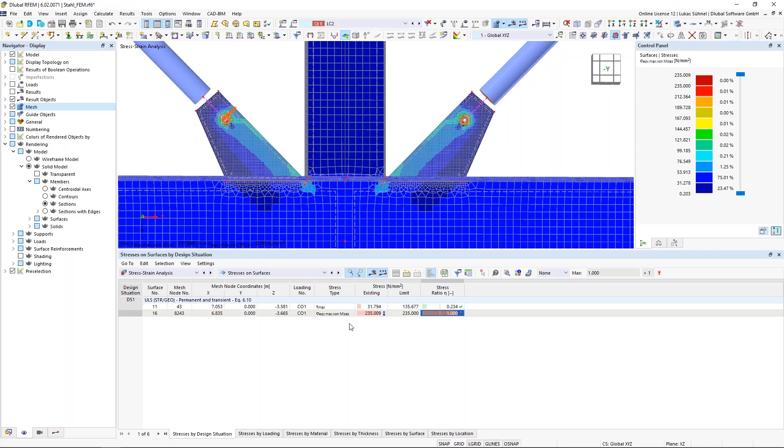I get the overview table where it says stress ratio is 1. If I check the details, it's just slightly above the limit. So it's just a numerical issue, not a big deal. We can neglect this. The stresses are, of course, fine, as you can see here. We have here 235 Newton per square millimeter maximum. We also have this pixel-like display of results. That's the result smoothing that I changed.

And of course, we can now also check the strains. As I said, this is now important. So instead of checking the stresses on surfaces, I can check my strains on surfaces. And this table looks also similar. We have an existing strain, 6.2 per mil. That's, however, the total strain. The plastic strain is just 4.4 per mil. And this plastic strain will be compared to the limit of 50 per mil, which results in this plastic strain ratio. So this is the strain design, basically.

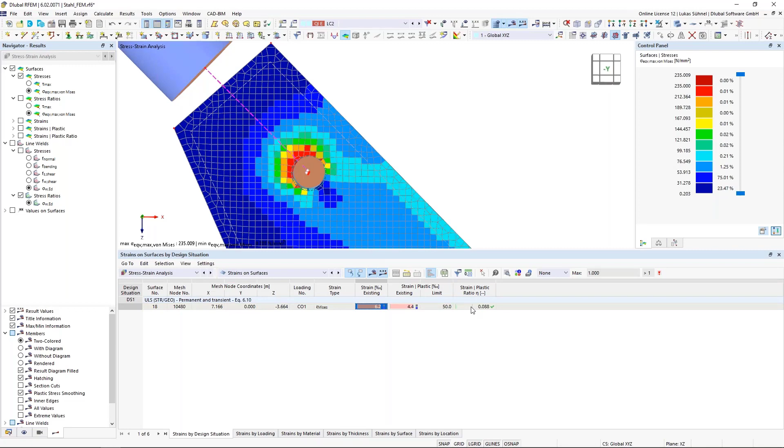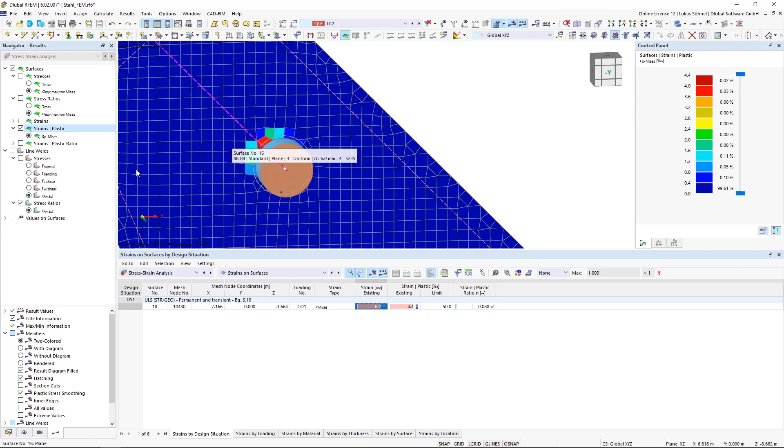This is how you can do it with the add-on stress strain analysis. And that is also what I would like to show you here. Maybe what I forgot now, we have, of course, also the strains as a result graphically, the total strain, but also the plastic strain, which is always smaller. And again, also the plastic strain ratio. Well, not much to see here, but the plastic strain.

Yes, so far regarding my 3 topics that I wanted to show today.